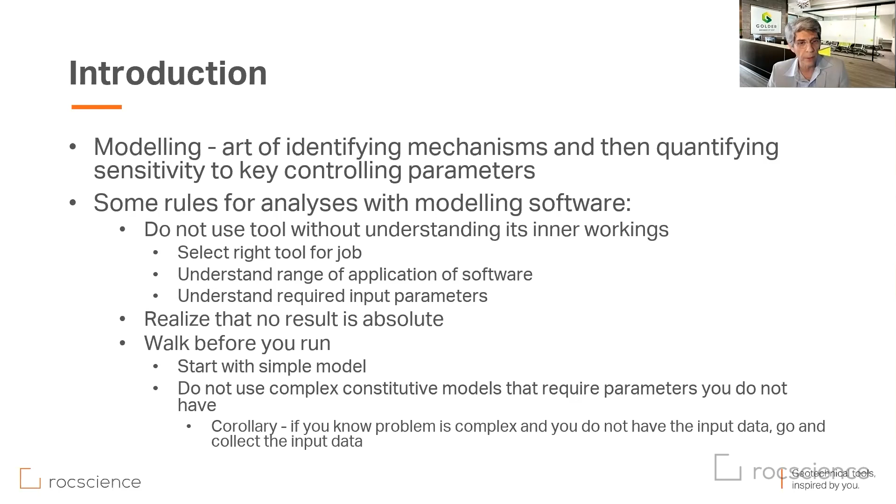The other very basic concept is you should walk before you run. Start with a simple model. There's nothing wrong with starting with a simple model. Do not use complex constitutive models that require parameters you do not have. That's just not feasible. The corollary for that is if your problem is indeed complex, then you need to go and get the right data to actually solve that problem. So these are very basic, and they sound a little bit philosophical, but they are the basis of good modeling. Next, please.

So one of the questions being asked today is, are these tools helping or are they hindering? We cannot deprive competent users of numerical tools just because some people will misuse it. Technological advances inevitably get used for wrong purposes, and I see malevolent use here as well. I don't think that's the case in our industry, but they do get misused, and that's no different in our industry. So we have the responsibility to minimize misuse. Now, it's an open question how we do that. Does that rely on educational institutions? Is there some kind of collaboration between software developers and educational institutions? What is the right mix here? What's the right combination so that we can help people use these things and minimize misuse? Next slide.

On dimensionality and use of 2D, 3D, and geometry. Often problems are three-dimensional in nature - I mean, they all are. We look at portals, connections, intersections of tunnels. These are truly 3D problems.

However, we can use 2D in many instances, but it's necessary to understand their limitations, and we need to complement this with such methods. We've created, for example, ground reaction curve methods to account for the 3D effects of a face, and we can learn from that and include them in 2D methodologies.

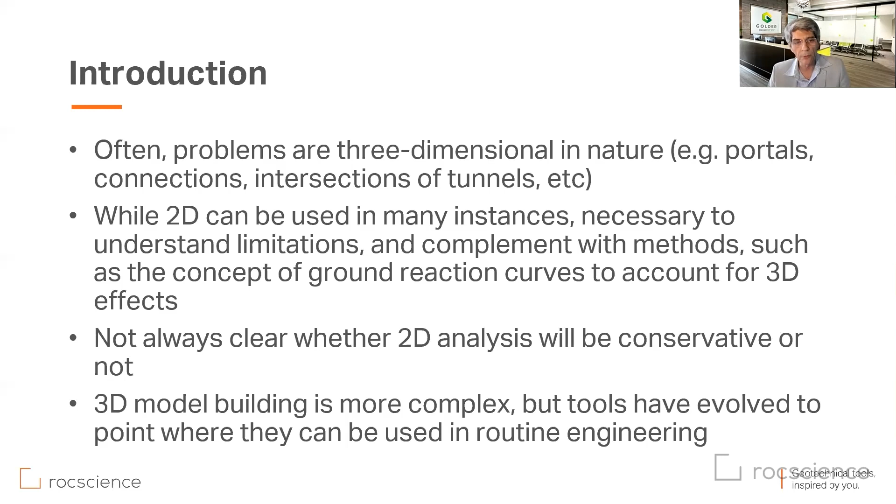And I just want to say something about geometry. There is a lot of heartache you can mitigate with geometry. Geometry to me is king. You can deflect stresses by using proper geometries in your open cross sections. That's seen in block caving and the selection of draw points and spacing between draw points. So everything revolves around geometry. Don't ever discount geometry to help you mitigate problems when you're looking at them.

And then we come to reality. How can we bring in more reality into the models? Rock is not continuous, rock is not isotropic. So we are used to using these models with constitutive models made for continua, and there is no real 3D anisotropic plastic model today that is really widely accepted. And what that does is make us rely on joint networks, on explicitly including faults and joints into our models.

Until such time we can include some of these anisotropic traits into continua, we'll have to rely on the joint networks. I want to talk a little bit about shear strength reduction. It is now a state of practice, especially when evaluating slope stability, but you need to exercise caution because you can very easily switch failure mechanisms as you are reducing the shear strength. You have to be aware that when you look at these results, you are comparing apples with apples. Look at your results carefully, make sure everything is monotonically changing and you're not actually changing mechanisms that will not allow for proper comparison.

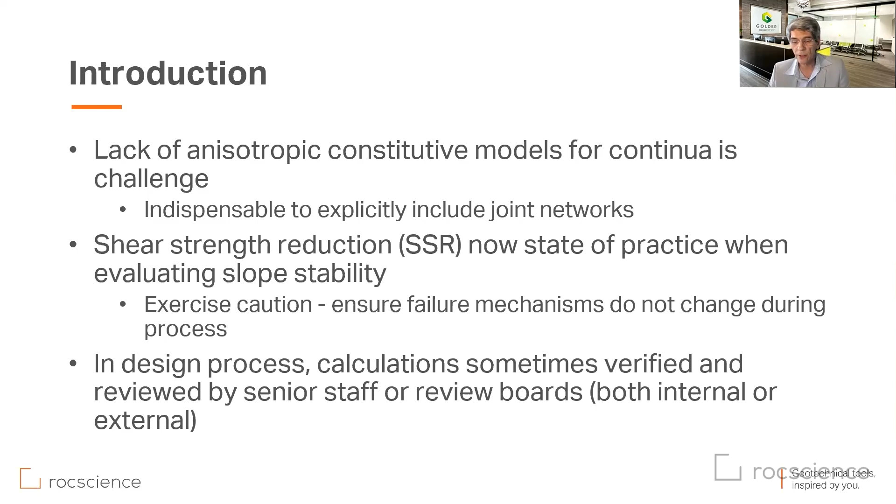There's a particular challenge because in traditional reviews, calculations came to you on paper - you could follow them, do side calculations on your own, verify numbers. These things are not readily transferred to numerical models. All of the calculations are hidden in the model. Even input parameters - you may go through them and verify and vet them for the model, but you never know if they were input in the model properly. So you always have to dig into the models and make sure you really did use the correct parameters. This is very challenging, which comes to this idea of QA/QC for modeling.

I borrowed these next bullets from a report from the Department of Education in the UK on principles of QA for modeling. You need to verify the models - you need to verify that they're being built right. So verification, the question is: has the model been built right?

You ensure the model is implemented correctly - you have a second model or a peer check it. Then you have validation, which asks: has the right model been built? Ensure that the model appropriately represents the problem. You have not built a model that is not representative, and whatever results it gives you has nothing to do with what you're trying to solve. So you need to understand the quality and the limitation of the data, as well as the assumptions in the model.

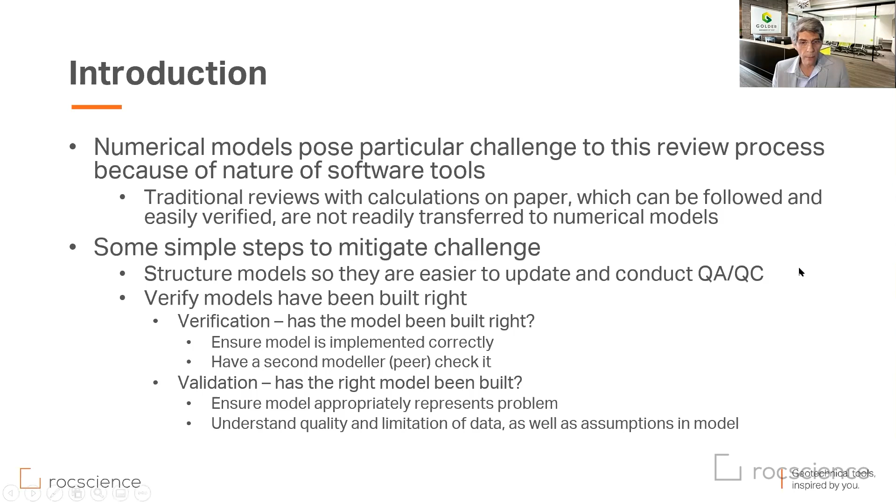Verification and validation, touched upon earlier, are the two components of good QA/QC. I'm going to leave you and let the next presenter give their position paper. Thank you very much, Dr. Carvalho, for expounding your position on numerical modeling.

Start simple, learn to walk before you run - that sounds like very good advice. I hope everybody is making notes, and we're going to ask some interesting questions. Please feel free to challenge any positions if you think something contrary ought to be done.

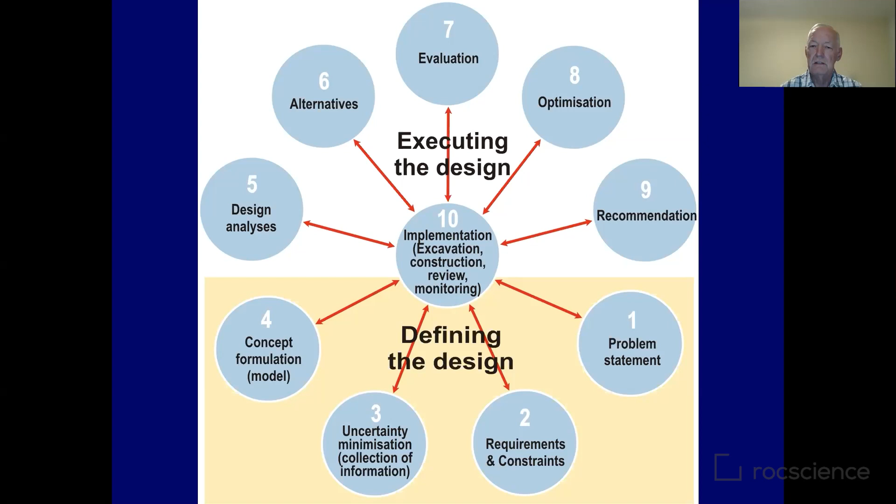Just to pick out some of Starfield and Cundall's numerical modeling philosophies and compare with Bieniawski's process: step 1 deals with the clarity of design objectives, corresponding with Starfield and Cundall's statement - be sure before you start that you are quite clear about why you are building a model and what questions you are trying to answer. Step 4 in the design process corresponds with look at the mechanics of the problem - try to identify important mechanisms, modes of deformation, and likely modes of failure.

Bieniawski also specified principles, one being the simplicity principle, corresponding with Starfield and Cundall's design or borrow the simplest model that will allow the important mechanisms to occur. Steps 5 to 7 of the design process involve running the models. Step 8 implies multiple models, corresponding with Starfield and Cundall's statement that it should be noted that implicit in the above guidelines is a rule that rock engineering models should never be run only once. It is in the sensitivity of the results to changes in parameters and assumptions that the model is most informing.

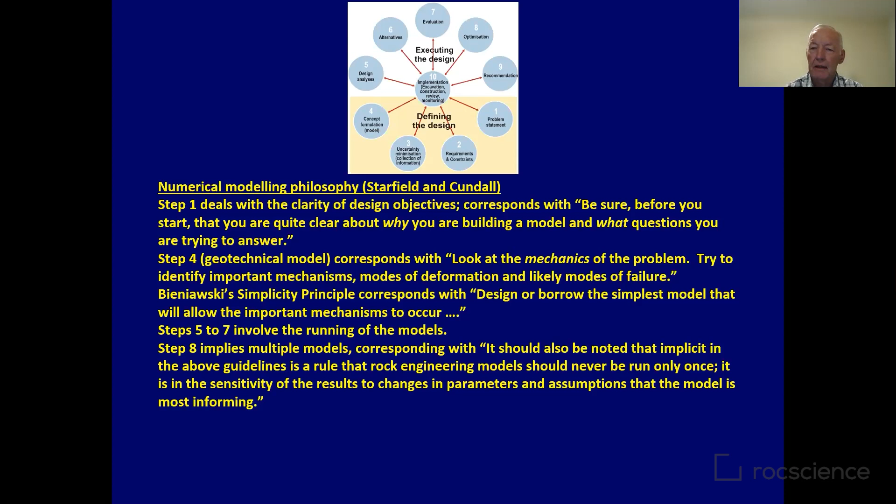Another point extremely important is the value of simple elastic modeling, again corresponding with design or borrow the simplest model. Excavation in rock usually involves unloading of the rock, certainly in at least one of the stress directions, and behavior is commonly linear in unloading, hence the value in elastic modeling. This doesn't mean you will have the same modulus or directly the same behavior, but if it's linear, then linear modeling is going to be very useful.

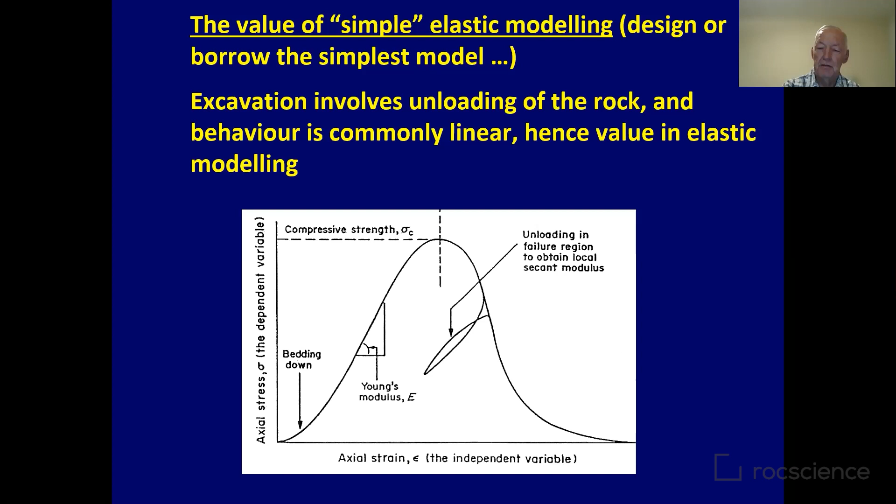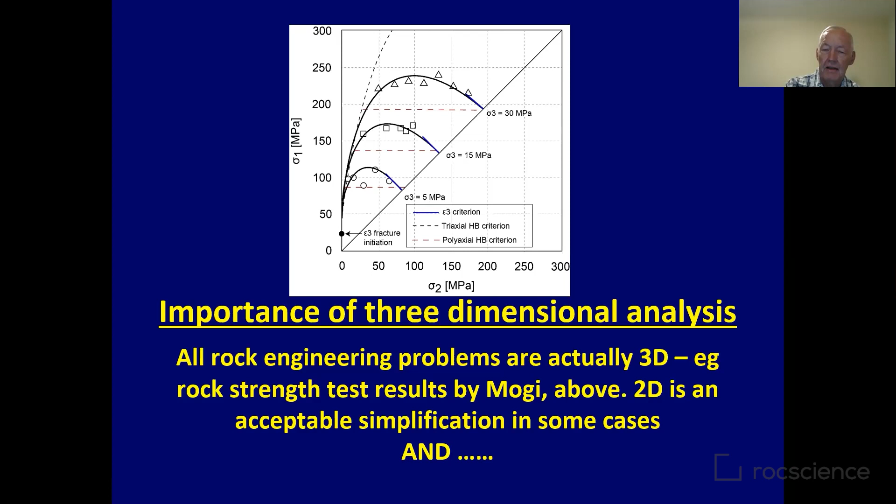If you look at the 3-dimensional strain stress matrix, you can see there's actually 6 moduli elements and 3 Poisson's ratio elements. Therefore, single values of E and Poisson's ratio in analyses, as we commonly use, could sometimes be misleading. I've never heard of anybody measuring a 3-dimensional Poisson's ratio or a Poisson's ratio for a rock mass.

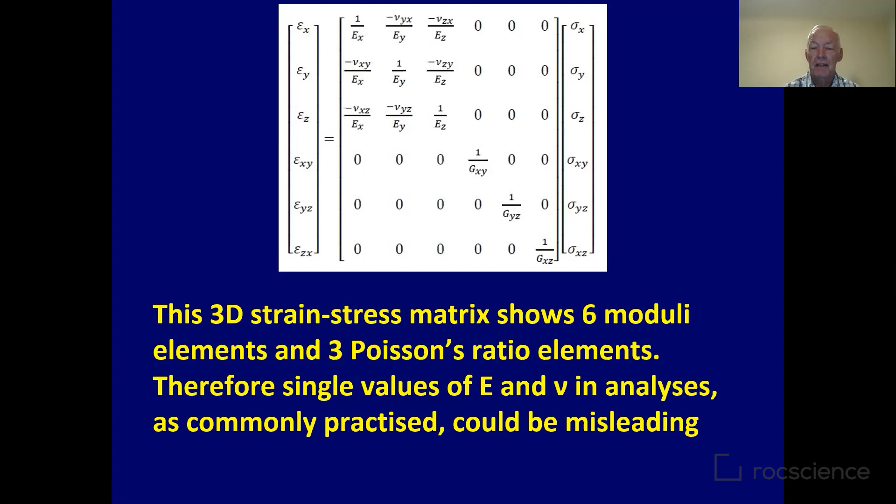As an example, synthetic rock mass analyses of an anisotropic rock mass show stress strain results at different angles. You can see how both the modulus and the strength of that rock mass are different in the different directions.

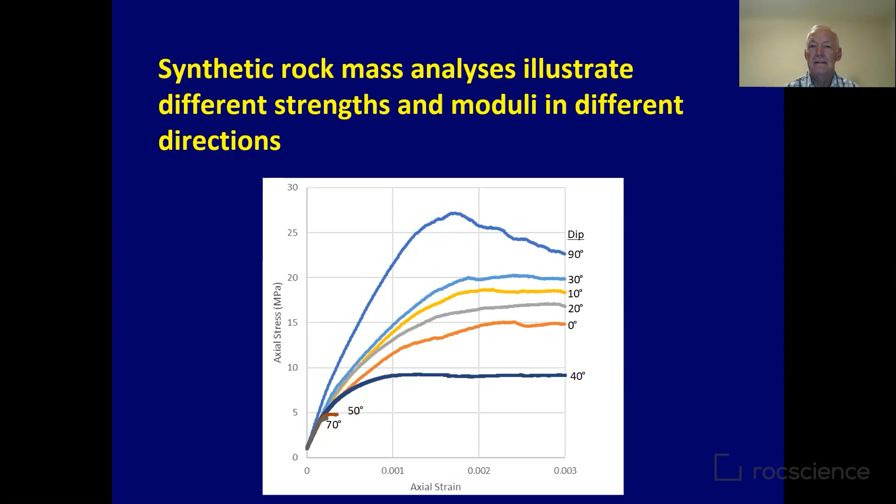Numerical models must take jointing into account because it's the joints which are going to affect the behavior. But we don't know their actual orientation except where we can see them on the surface where they're exposed. So within the rock mass, we don't know what the persistence or spacing is of each joint set. We only know the statistical variations, and therefore we need to carry out numerous analyses to take into account the variability.

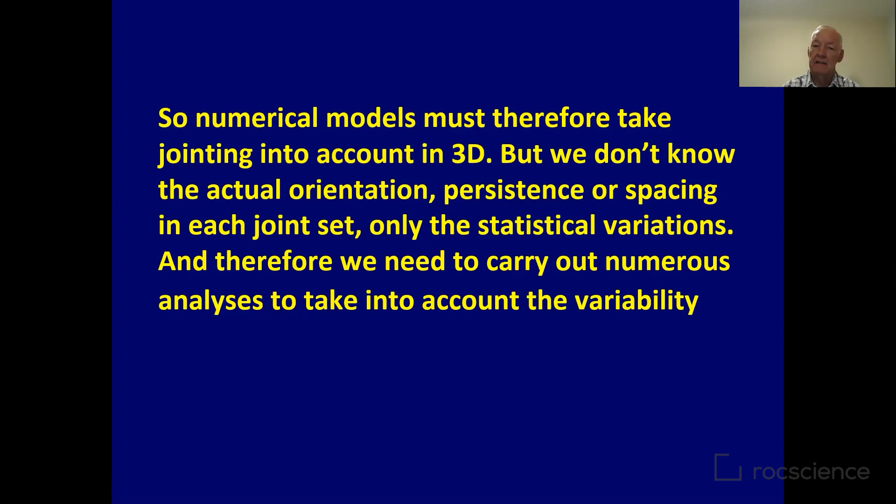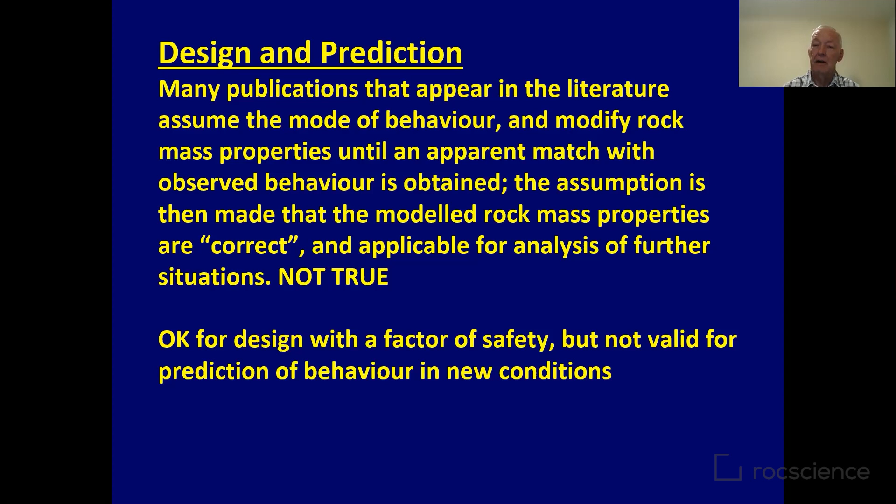Just a point about rock masses and rock mass behavior that one often sees published in the literature, and I've seen this on numerous occasions, where behavior is assumed. In other words, a criterion is assumed, and there's real data, and the properties of the rock mass are adjusted until there's a match with the observed behavior. And then the assumption is made that the modeled rock mass properties are correct, and that they can be used for analysis of further situations. And that's just not true. Although I would say that if you're using that for design purposes with a factor of safety, it might be okay, but usually it's not valid for the prediction of behavior under new conditions.

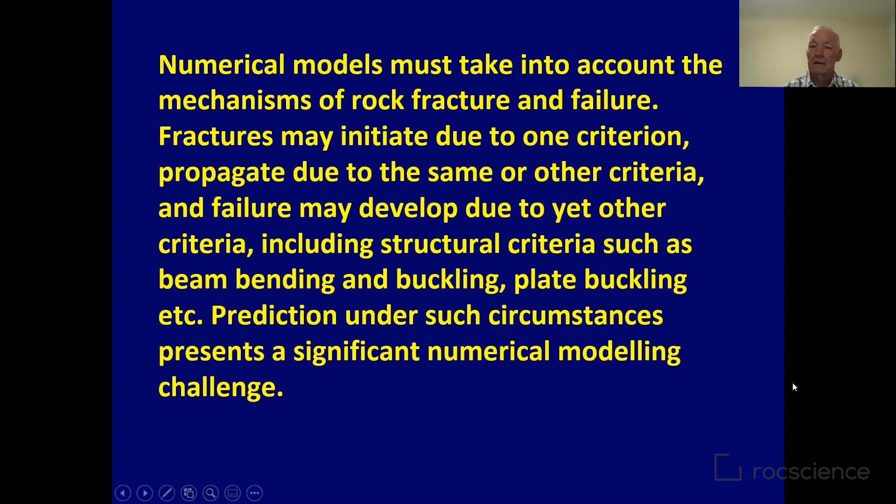I think that's my last one, yes. So that's my thinking on the subject.

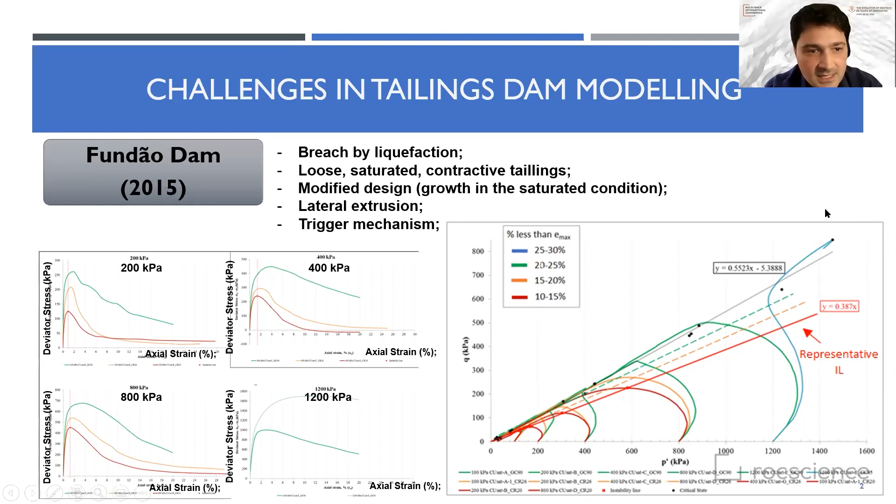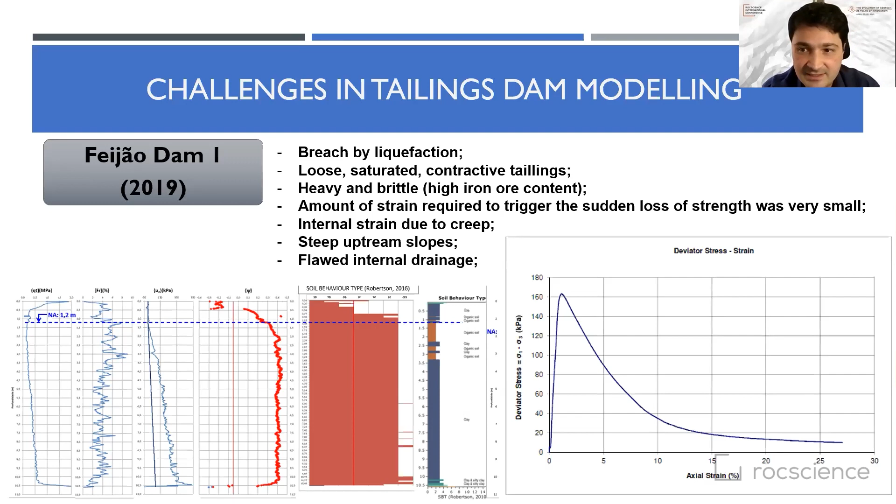Although there is significant uncertainty regarding tailings behavior, numerical modeling can help geotechnical engineers simulate and estimate tailings stress-strain response. Next slide, please. We can see on the left a calibration of a NorSand constitutive model for an iron ore tailing using CPTU data. We can see axial stress-strain, and the calibration for a deviator stress of 800 kPa.

But it's challenging to represent a strain softening response with different post-peak loss ratios, depending on the deviator stress of triaxial tests. After calibration, numerical modeling can be conducted to assess the stress-strain results and verify the possible formation of progressive failures, excess pore water pressures, yielded elements, and others.

So the numerical models start in the field. I think that's the first step to start a numerical model: recognize the structures we are going to deal with, and then plan good investigations, and plan our lab and field tests. Then we go back to the office and analyze the results.

Analyzing the field and lab tests, we can identify those tailing signatures and create different domains concerning behavior. We can see very different strain softening responses with different post-peak loss ratios. The uncertainties around tailings behavior and failure modes complicate numerical modeling. They affect engineers' ability to predict and monitor creep movements, progressive failure, and lateral spreading.

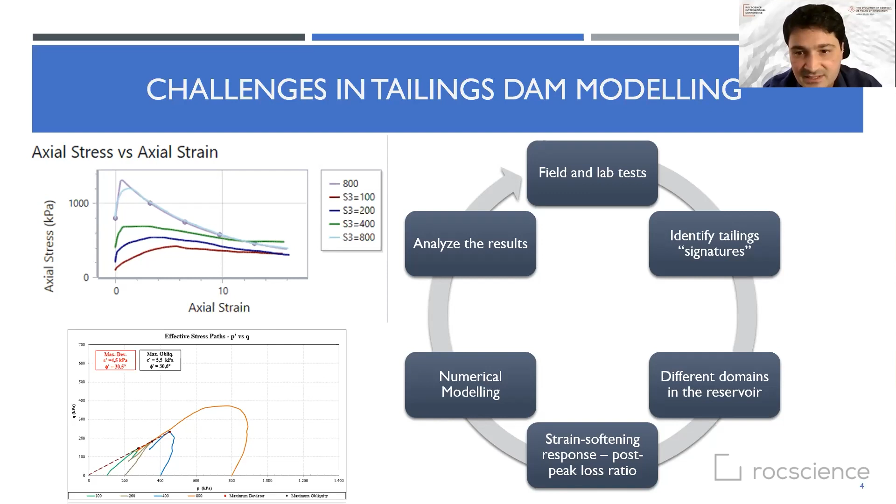Next slide, please. I believe that new constitutive models, laboratory tests, powerful software, and mainly geotechnical knowledge are required for better safety assessments.

So we have a lot of uncertainties. We have different failure modes and triggers. Triggers are quite difficult to analyze as well. Limit equilibrium has limitations, and significant effort must be made, but new constitutive models and new software are going to lead us to more reliable numerical modeling. Next slide.

Thank you, thank you very much Tiago, for giving us your position. We really appreciate that you bring us perspectives on tailings dams. But for those of us who are not Brazilian or not too familiar with these names, for me, is Feijão the same as the Brumadinho disaster? Just so in my mind I get that sorted out.

Yes. All right, Feijão is the name of the mine that is located in Brumadinho city. Okay, so Feijão is the name of the mine and it is located in Brumadinho. Excellent, yes, thank you for the geography lesson. At least now I know what we're talking about.

And then also, at some point when we get into the discussions, Tiago, I'm going to ask you about something you repeated several times, and all the panelists will get a chance to talk about it. You said the limitations of limit equilibrium - do we really know them? So let's keep that in mind, and when we switch to the debate we'll start with one of those questions. I've already seen questions coming on the platform, so that's a great sign.

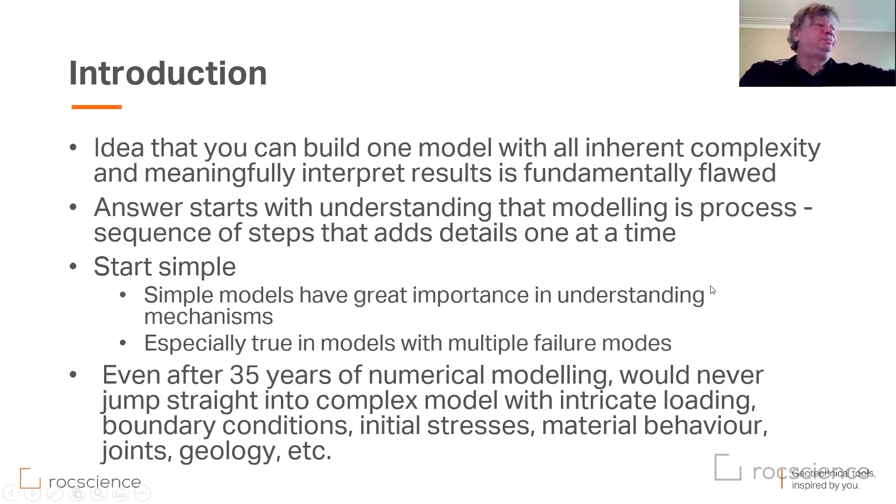So the first item here, when I look at it, this really forms the basis of Rocscience. When we were looking at things back in the 1980s and 1990s, under the leadership of John Curran and Evert Hoek, the whole idea is that there is a lot of uncertainty in our models, a lot of uncertainty in the input parameters. There's uncertainty in the material properties, uncertainty in the stress properties, the in situ stress properties, and uncertainty in the geology. There is just a lot of uncertainty.

So these tools have to be quick, and you have to be able to do sensitivity analyses, meaning you need to explore different possibilities of different parameters, and it has to be fast.

And that sort of instigated a number of our tools, and why we developed these tools. Mark had a nice term for them: socialized numerical models, meaning that anybody can run them and run them quickly. Ground engineers, everybody could run them, and basically it would allow them to explore different possibilities. I think that's a really important fact.

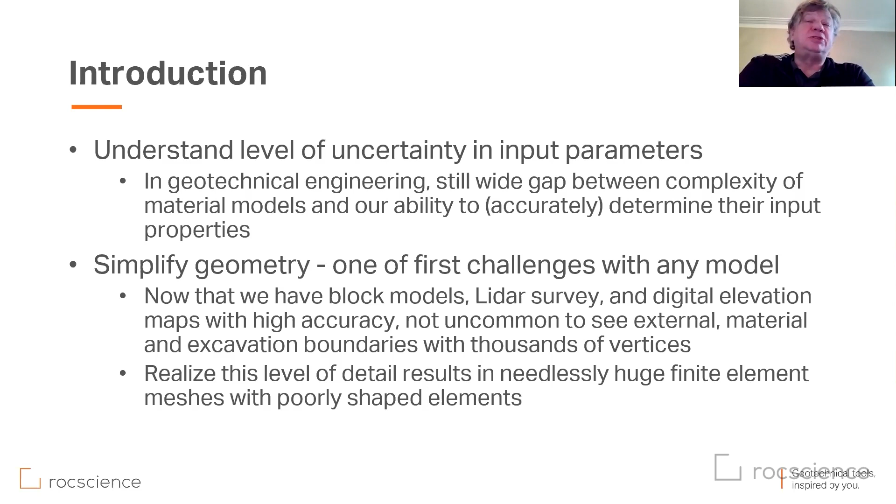I think this enters into 2D versus 3D and where we have to go with 3D. Now 3D models, as Mark said, we're once again in that realm where 3D models are not run a lot. They're generally run by consultants, and really we need to get to a point where 3D models can be run by everybody quickly and explore this different uncertainty.

We talked a little bit about elastic models, and I quickly mentioned that the way I like to do things is I start simple. I start with one stage. I look at the initial conditions on something like a slope. I look at the initial stress state. I put in all my meshing, my boundary conditions, and I always keep it elastic. The last thing I add is plasticity, because plasticity complicates the problem and also causes the models to run a lot slower. Really, to me, it's all about speed in getting these models set up correctly.

Joe mentioned a lot about verification versus validation. I'm in the verification stage here, and that's probably because I've seen so many customer models that are incorrect at this basic step—either it's boundary conditions, or initial stresses, or something to do with loading. So it's really important to get this initial setup correctly.

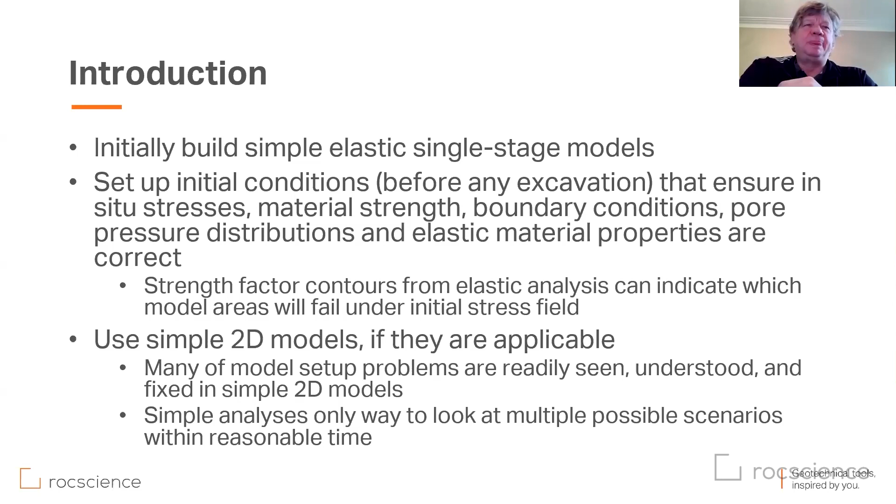Finally, this is sort of the cool part: where is Rocscience going? Where are we going as a company, and what do I envision myself? We are going 3D, but as I've said, 3D is a can of worms here, and we do need to account for uncertainty. We need to get these things faster.

And we need to validate them, right? We saw that the panel yesterday was fantastic, where we talked about completing this cycle, and we've talked about this for 20 to 30 years, as John Curran and Will Bawden would tell you—this was a vision long ago, that the ability to take sensor data, or in the case of underground, bolt data, extensometer data, and use it to calibrate our numerical models.

One other thing I wanted to mention before I move on: finite element and limit equilibrium. Because I do a lot of slope stability, I've seen a lot in this conference, and I would strongly recommend that people be using both. I always use shear strength reduction with limit equilibrium—they help verify or validate the results. There are a lot of issues with limit equilibrium; we'll be talking about some of those in the future, but shear strength reduction is just a hugely easy tool to use to validate these types of models.

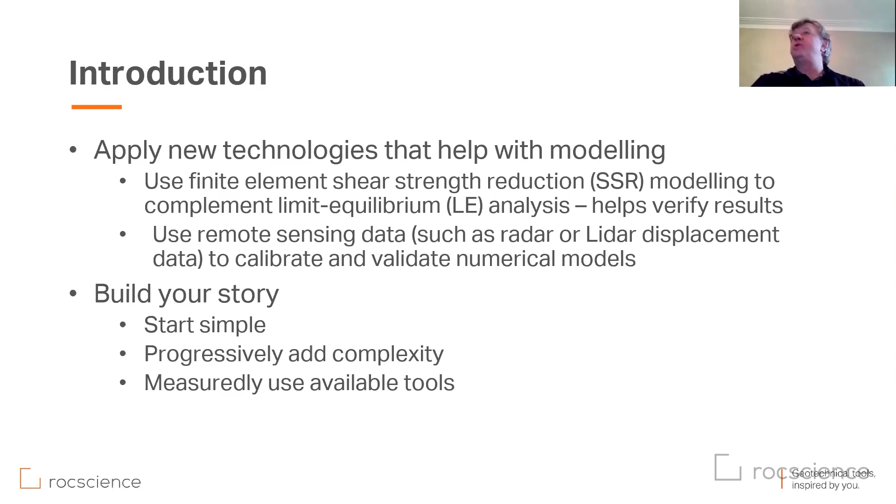We're working on something called the fast multipole method, which will allow us to do really huge boundary element meshes in not a lot of time, no matrix solving. This is going to be really cool. I still have a vision that we'll be able to examine things in 2D and 3D where we can easily start moving excavations around and changing properties, quickly seeing the effects of these changes. We're also looking at data visualization, how to handle huge data, and augmented reality.

So anyways, I'm going to turn it back over to Reginald and we'll go from there. Thank you very much, Brent. And thank you, Tiago, Joe, Vic, for giving us your positions.

That was really good. Already there are a lot of questions, so I will return to the limitations of limit equilibrium later. I want to get the audience immediately involved. The first question came from Dr. Trevor Carter. He asked about Ralph Peck's 1985 comments, which read: today's sophisticated calculation is too often substituted for painstaking subsurface investigation, and unwarranted comfort is often taken in the delusion that a range of assumed values, possibly all of which overlook a vital feature, guarantees that the correct results will be bracketed by the calculated ones. Are we raising the same concerns again, but maybe even more worrisome now? Our models may have become too complex to be able to properly validate. So the issue is, are we over-modeling? I guess that's literally how I understand it. So who wants to take the first dip at it?

Joe, I see you gulping, so maybe you go first. You're picking on me now.